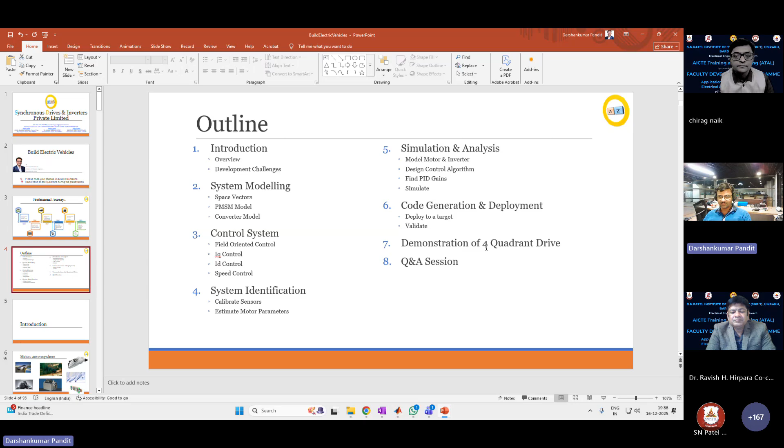One guy is asking to join, so I'll just share the link. From there we will go towards mathematical modeling, control system design, system identification, simulation and analysis, and code generation and deployment. I also have a demonstration at my desk here, but it might take us longer to go through that because I am still preparing that.

And I have to just forward this invite to the meeting. Sorry about that. Okay, yeah, so that's an overview, and then we can take questions and answers. Or maybe you can take questions and answers first and then go for the demonstration since it is going to take time.

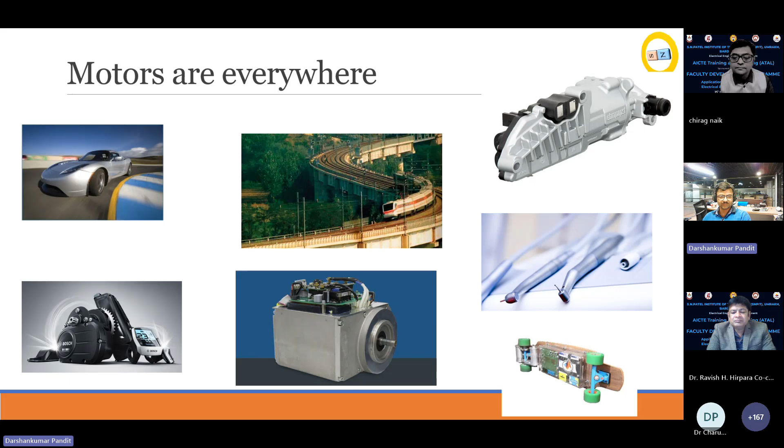As an introduction, motors are everywhere. We all know that electric vehicles have it. Apart from that, there is a lot of traction motors in railways as well as the suburb metro rail. There are electric compressors, air conditioners, power tools, and many medical devices that use these motors. What's different about them when it comes to automotive is that we can operate the motors in four quadrant operation, as against the IC engine which can only be operated in two quadrants of operation. These quadrants are mechanical or electrical quadrants.

If you designate one direction of rotation of a wheel as positive, let's say clockwise rotation is positive, then any torque that forces the wheel to move in that direction is also positive torque by convention. When both go together, the vehicle moves forward - this is called forward motoring, where speed is positive and torque is also positive. Power is the product of torque and speed, so power is positive.

In electric vehicles, power is stored inside battery systems. When power is positive as per this convention, electricity is converted from electrical energy into mechanical energy output at the wheels.

There is also reverse motoring, where the wheel moves in the counterclockwise direction, and the torque applied is also counterclockwise. Again, power is the product of torque and speed. So the vehicle moves in reverse, but the energy is still positive, meaning energy is still converted from electricity into mechanical energy.

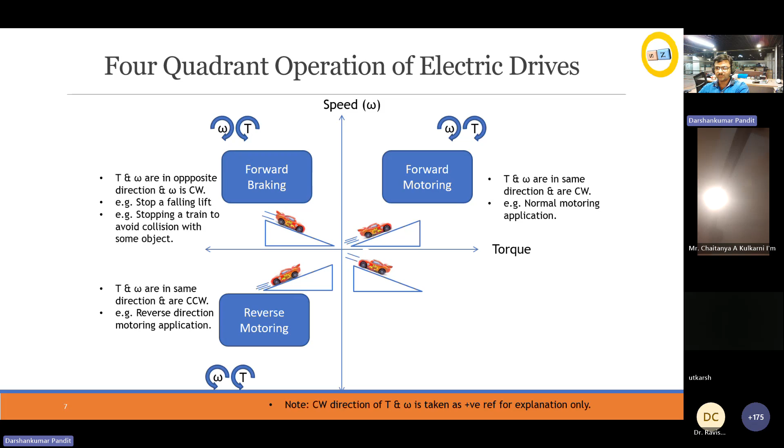Then we have forward braking, where the wheel moves clockwise but torque is applied counterclockwise. In simple words, you're going downhill and want to apply torque against the direction of rotation of the motor to stop the vehicle from going downhill - that's applying brakes, or reverse direction of rotation from the electrical motor. This requires a torque-speed product that is negative.

Whenever the torque and speed product is negative, it's possible to convert the machine from motoring into generation, or apply this energy into mechanical braking systems. This region is known as forward braking, forward regeneration, or regenerative braking. Here we're converting energy from mechanical input into electrical output, which we can save into batteries.

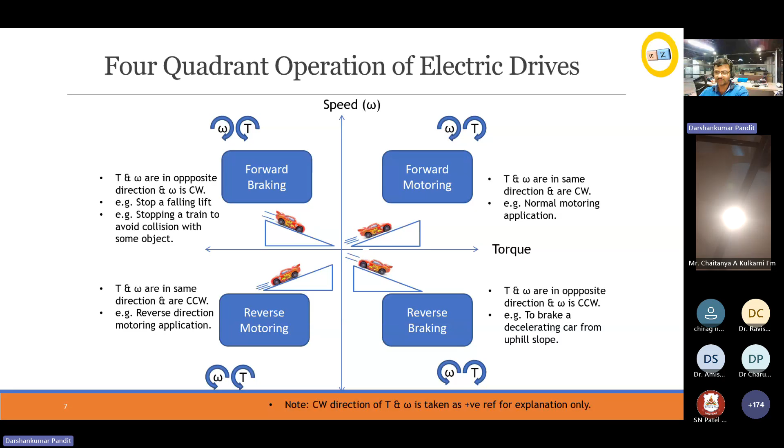We also have reverse braking or reverse regeneration, where the vehicle is going downhill but in reverse, and you want to propel it forward. So torque is applied positive while wheels are going in negative direction - again the product is negative. The energy is converted back from mechanical to electrical in case of reverse regeneration.

Electrical motors allow us to switch from motoring to generation based on their inherent characteristics of energy conversion from electrical to mechanical and vice versa. This is why we call them machines in general, not motors or generators.

There are different types of machines operating on different principles, which are fundamentally the same, but based on operational principle we call them DC machine, AC machine, and various other types for the electric vehicle industry. They're classified based on two basic factors: volume and weight. The lighter the weight and volume, the more suitable it is for electric vehicle applications. If too bulky, it might require a bigger vehicle like a railway engine, which used to use DC machines and are now migrating to induction machines.

But for small cars and vehicles, we cannot use big motors. So what's getting popular for these kinds of vehicles is the permanent magnet synchronous machine, and there's also another category called BLDC machines. Nowadays there's increasing popularity of switched reluctance machines and synchronous reluctance machines. Each type has its own complexity in operation, advantages and disadvantages, and primarily weight, volume, and efficiency are making them popular for different applications.

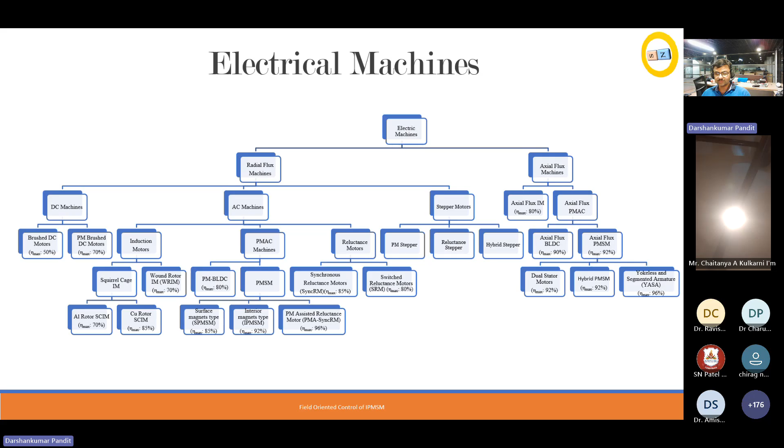Today we are going to talk about permanent magnet synchronous electric machines, where we use permanent magnets to energize the field of the machine. This can be DC as well as AC. Within AC, we get more efficiency, and the back EMF can be trapezoidal as well as sinusoidal. Whenever it's sinusoidal, the windings are distributed sinusoidally, allowing us to produce torque uniformly. For BLDC, we have glitches in torque generation.

Within sinusoidal type machines, there are two types of rotor arrangement: surface mount magnets and interior mount magnets. These are classified further as surface mount and interior mount magnet based machines. The left one is the surface mount PMSM and the right ones are the interior mount PMSM.

The interior PMSM has an added advantage that it also allows some reluctance torque, meaning that if the magnet gets demagnetized, the machine is still capable of producing torque based on the reluctance machine's principle. However, reluctance torque in case of IPMSM is less compared to the electromagnetic torque, which is generated because of interaction of the magnetic field with the stator's rotating field.

I'll explain what that is shortly. But there are some advantages and challenges of each type of machine.

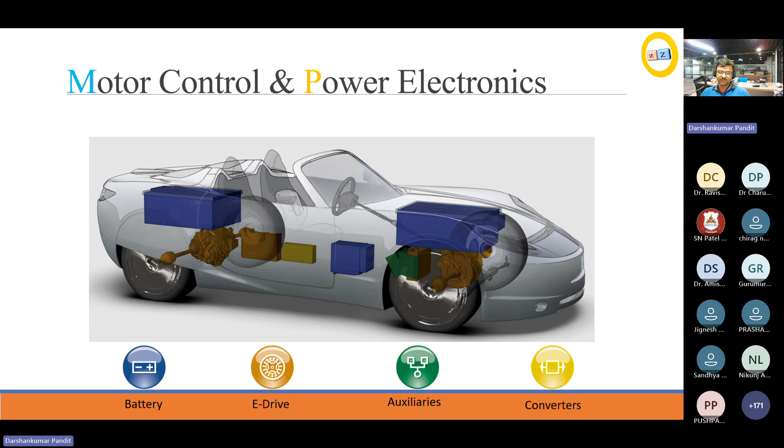As far as a vehicle is concerned, power electronics is used everywhere: inside the battery in the battery management system, in the e-drive system also known as motor controller, and in auxiliaries such as DC to DC power conversion. We need to reduce battery voltages, such as the 350 volts used in Tesla Model S and Model 3, into 12 volts required by auxiliaries like headlights, side lights, indicators, wiper motor, and window shield. That's where DC-DC converters are employed, and there are different types of converters.

The control system processes this and generates gate pulses. These gate pulses are fed to either a MOSFET or IGBT based inverter, and the inverter converts the DC electricity into controlled variable voltage, variable frequency currents required by the motor. That leads to the exact required torque, which is then given to the transmission, usually a single speed gearbox, and that moves the wheels.

When we want to do generation, we apply torque in opposition to the direction of motion of the wheels, and that generates electricity. We use that to store charge inside the battery, if the battery is capable of storing it.

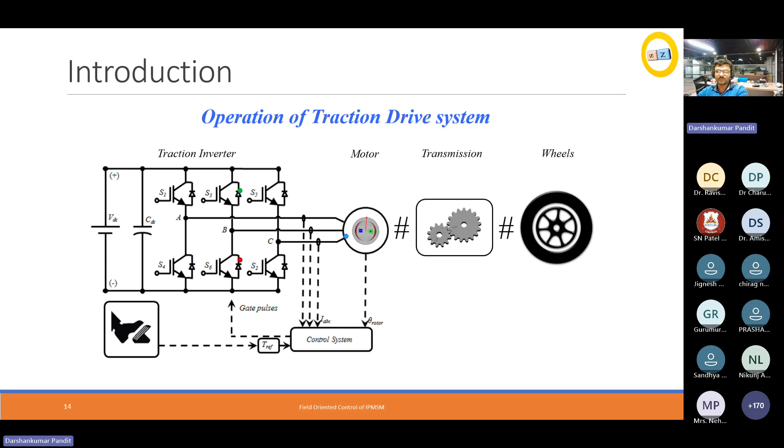We can also do independent generator control. This is a concept which is getting picked up. By doing so, we can operate the IC engine at its maximum potential efficiency, and we can improve the efficiency of the IC engine. There is also a concept of range extended electric vehicle, where you can power an electric vehicle from battery as well as an IC engine.

This is also similar to the series hybrid electric vehicle concept, where the same machine works as a generator and motor. Of course, there are two different machines, one for generator and one for motor, for mechanical coupling with the IC engine and wheels respectively. If the battery is discharged, the IC engine can power up the whole system and vice versa. In some cases, the IC engine is replaced by a fuel cell, so we call that fuel cell hybrid electric vehicles, such as fuel cell buses in India. In some cases, there can be a CNG machine.

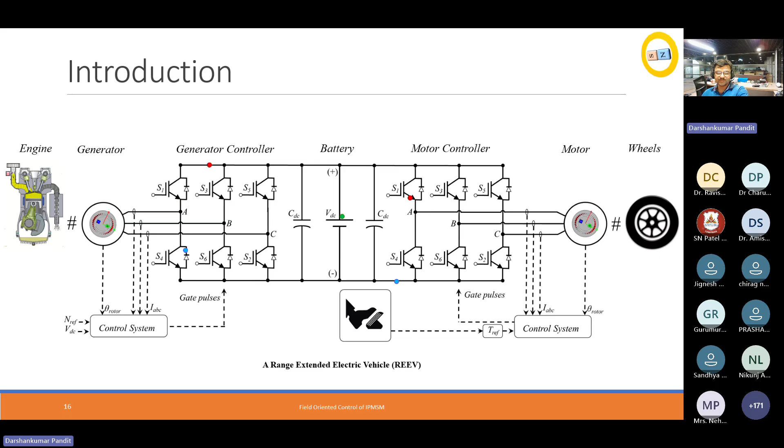So that is briefly the concept of the inverter. Now, in simple words, how do we convert this energy flow? If we take a simple concept of a DC machine or a BLDC machine, here is how the current will flow to produce a positive torque.

Two switches out of the entire six bridge will work at a time. Whenever we want to generate positive torque, we want to make the current flow from winding A into winding B, and that is how these switches will conduct in this schematic, so these gate pulses will be fired.

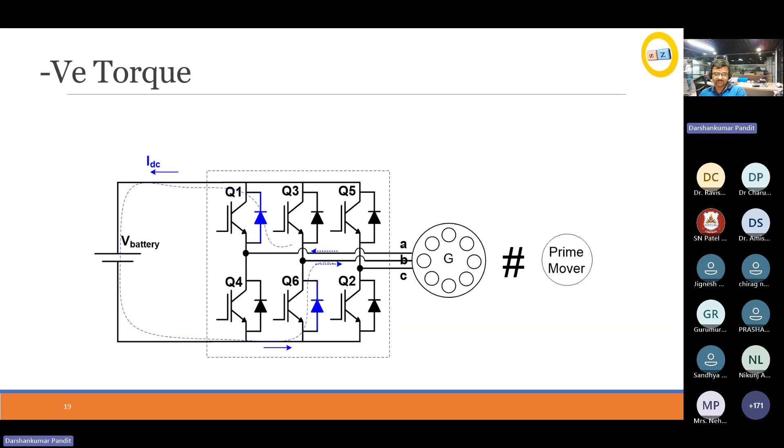But when the current flow through winding A and B reverses, the same machine acts as a generator. Instead of those switches, the anti-parallel diodes will conduct, and the current flow at the DC link also will reverse. For the DC link, the power is represented by the product of VDC into IDC, so in this case that power is negative.

That means it is working as a generator, at positive speed. Again, we go back to the theory where current is flowing into the motor A phase winding. But if we want to change the direction of rotation of the wheel, provided we have the position information, this can simply be achieved by changing the active phase from A to B phase. This way we successfully manage to reverse the direction of current from the motor winding. However, the current coming from the battery is still in the same direction.

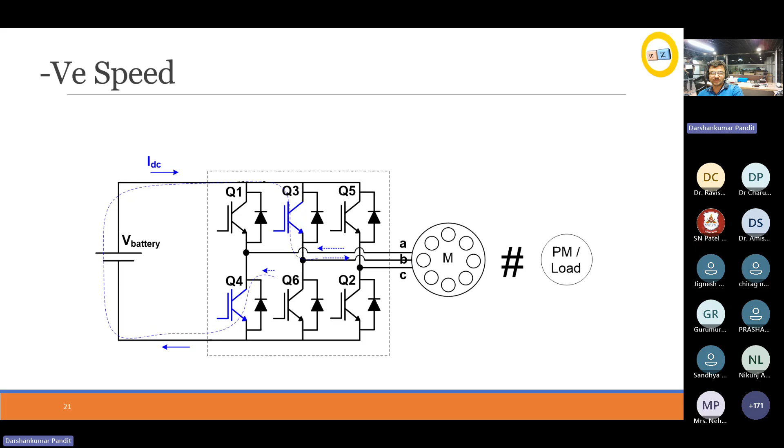So the power flowing from the battery is still positive, and electricity is still converted to mechanical energy while reversing the direction of rotation of the machine. Then there is a fourth case, reverse regeneration, where we reverse the direction of rotation, and the antiparallel diodes of Q3 and Q4 switches will conduct. That is not shown here.

When we want to implement this motor control algorithm for electric vehicles, we also see a lot of developmental challenges. These are majorly categorized between modeling and simulation at the system level, then control system design, then embedded system programming. A lot of embedded systems are there, and then implementation on real world hardware. Some of these challenges are explained here.

First, we require the accurate rotor position of the permanent magnet motor, and this is achieved via some sensors, which are Hall sensors or quadrature encoder sensors, as illustrated here.

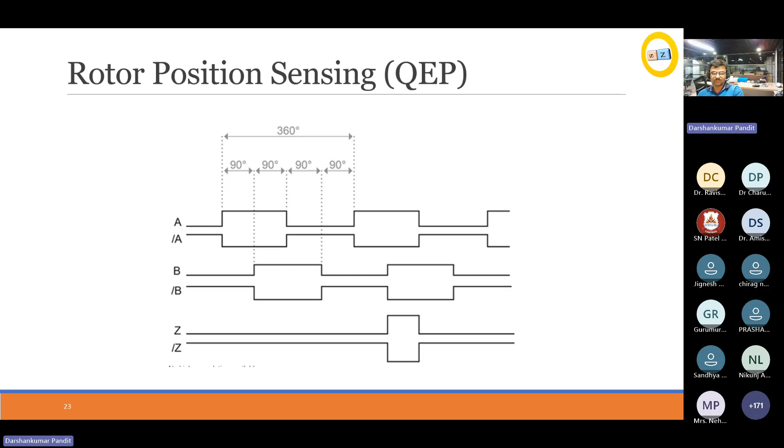Then there are some machine characteristics we have to adapt to. They are not exactly as per theory, so we have to identify these machine characteristics and then operate the machine at that operating point.

The traditional control theories such as field-oriented control or direct torque control also have limitations which require modification by additional control theories, such as maximum torque per ampere, or unity power factor, or constant torque angle control, constant stator flux angle control, depending on the type of motor, which is IPMSM in this case.

So we have modified field-oriented control, and then there is something called field weakening. There are four types of field weakening which we need to implement.

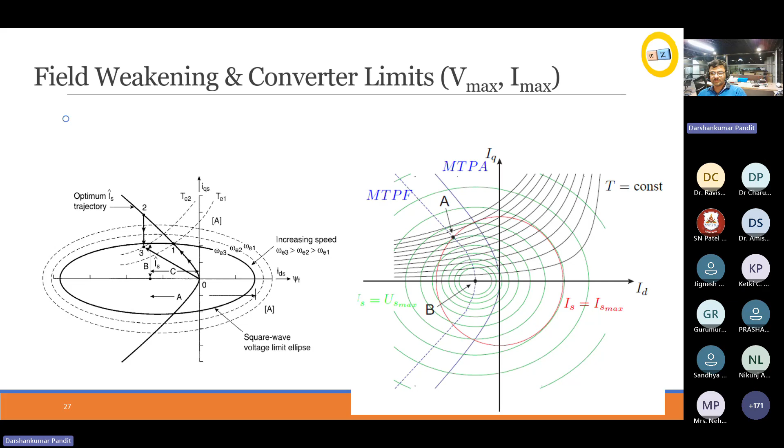By implementing these different algorithms, we are ensuring that the machine always operates at its maximum efficiency point. The copper losses are same as core losses, and the machine also operates at a speed higher than the rated speed while trying to maintain this energy balance. That is just discussing some of the challenges.

Now, when we want to start development, how do we start? The first is systems engineering. We need to understand the system, and in order to do that, we have to convert the entire real system into a computer model. So that is what we are going to do.

But in order to understand that, we will have to understand some concepts from signals and systems. So that is what I'd like to cover here, in case the students are not from an electrical engineering background.

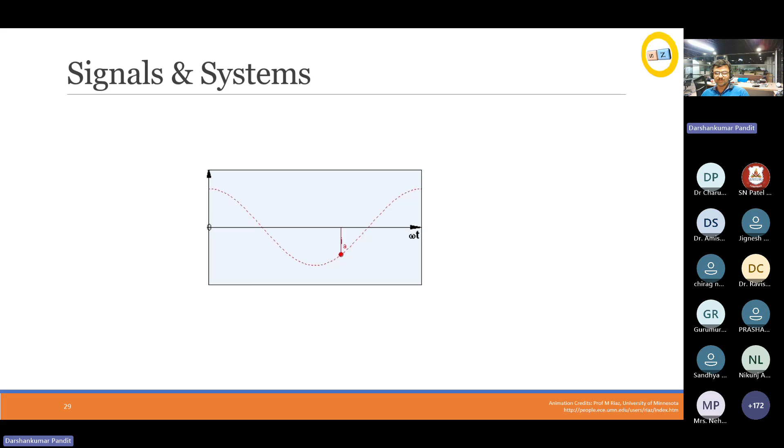In electrical engineering, voltages, currents, flux—there are many quantities which are sinusoidal and time varying. It's not possible to plot them easily because at every moment of time this red point changes its amplitude, so it's difficult to process this information as long as it is time varying.

What we do in electrical engineering is change this complex sinusoidal waveform from the real world into something known as mathematical space. Within that, there is a vector denoted by this light blue arrow. That vector, when considered rotating in a counterclockwise direction at a frequency, is known as the electrical frequency of the vector.

This mathematical space can represent the real world physical quantity such as voltage, current, or flux. So one light blue vector rotating in a counterclockwise direction, which is conventionally positive for electrical engineering, can be decomposed into one phase, two phase, three phase, or n number of phase components. And we managed to convert the sinusoidally time-changing quantity into a mathematically rotating vector in mathematical space.

Now, what we are going to apply is this theory by Albert Einstein of general relativity for electrical engineering in order to control our motor. What is the theory of relativity? I think everybody is familiar with that.

If you are at a station and you see a railway moving, the train is moving, then you will see that moving. If you are inside the train, you will see the station moving. If you are inside another train that is at the same speed as the first train, then you will see the first train as stationary. Now, all of these concepts that we learned at school—they are applied in linear motion. The train always moves in one line.

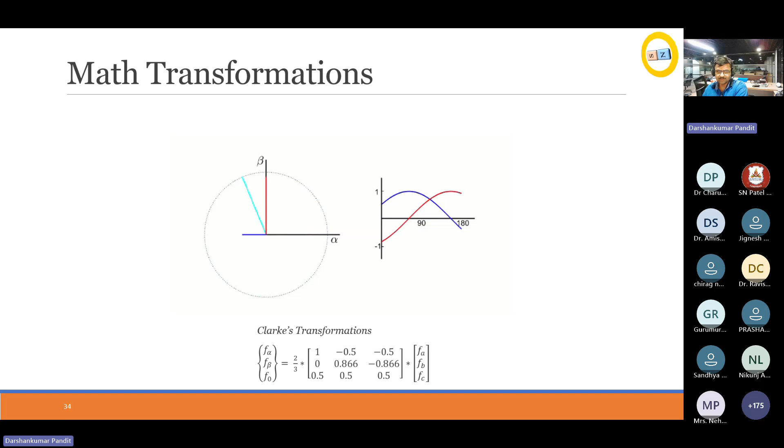Mathematically, we apply the same concept, known as Park's transformation, where the axes which were stationary earlier are now rotating. So the vector which appeared rotating to you in the stationary reference frame now becomes a rotating reference frame, and in this case it is rotating exactly at the same speed as the fan, known as synchronous speed.

When this happens, the projection of this vector on these two axes, which were sinusoidally time-changing before, becomes a constant DC quantity. By doing this, we have also removed one quantity which Albert Einstein was successfully able to remove in physics, known as time. So now we got rid of time, and it's just a DC voltage, DC current, or DC flux, and it's much easier to control DC systems.

How do we implement that? I have made all of these blocks. If you use MATLAB, you can find them inside the motor control block set. All this math which I was talking about is already done, and you can use these blocks, or you can create your own.

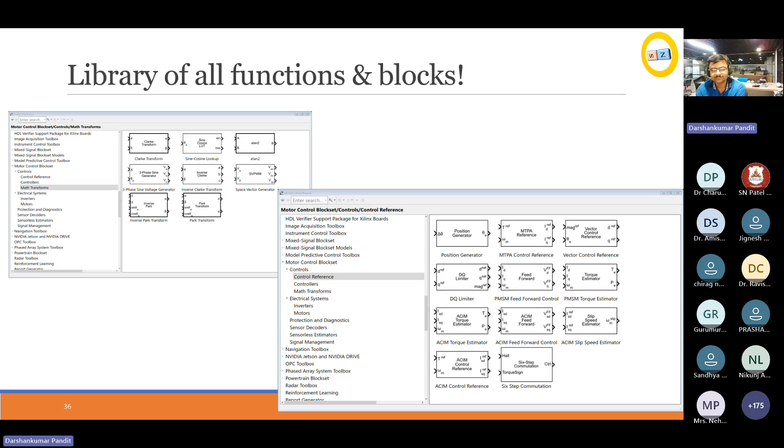If you're good at math, you can create your own blocks and measure the voltages or currents, feed them into Clarke and Park transformation blocks, and read the position information either from a sensor or various sensorless techniques, and then try to implement a control theory.

In this case, the control theory is field oriented control, where we are trying to control the D and Q axis currents, which is what is in these middle blocks. There are two PI controllers, and then they will generate some voltage references.

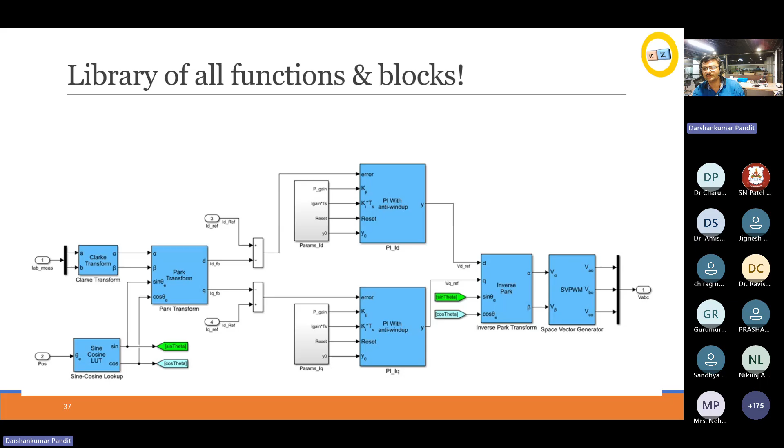When we do the inverse of what we did in terms of Park and Clarke transform, that is called inverse Park and inverse Clarke transform, and then we get AC quantities back. In doing this, we can also apply a different modulation technique that allows some more advantage in terms of utilizing DC link voltage. That modulation technique is mentioned here, also known as space vector modulation.

Now I hope there is no doubt until now. We were able to reduce the complexity of a time-changing quantity successfully, and mathematically we are able to do something that is controllable. But how do we control a physical machine? Because it's a big machine that is going to move our vehicle.

But if we manage to solve them, we can also predict the behavior of the machine in time. We can know what will happen to the currents of the machine after, let's say, 1 hour or 1 minute, and we can control the machine accordingly by applying a different voltage than what was expected. So we not only got rid of time, we can predict the future by means of this mathematics, and that can be done by implementing all of this correctly.

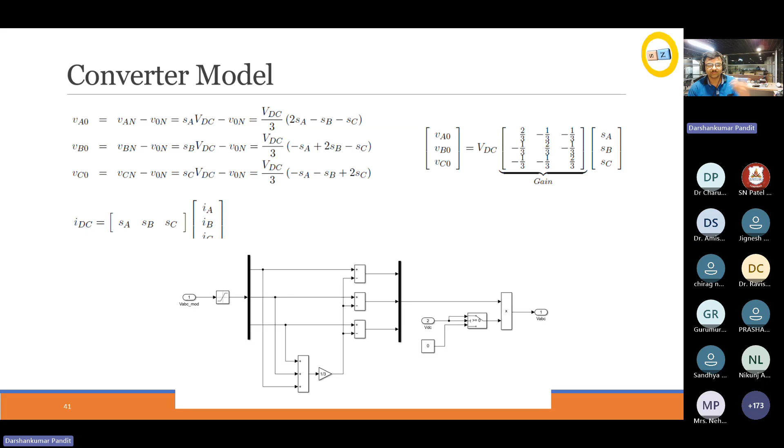The last part which we need for simulation is the converter. The converter is nothing but 6 switches, which can be reduced down to 3 switches mathematically, and we can create a model for the converter as well. So all these mathematical models are there, and we can go to the next step.

So we understand the system, we have a physical representation of the system in differential equations, and we can reduce the complexity of the system from an AC time varying quantity into a DC machine. Now DC machines are easier to control and we can apply different control systems.

The popular one is field oriented control. There is also BLDC 6-step control. There is also direct torque control, and all these techniques get modified by different maximum torque per ampere techniques and field weakening techniques. So the exact implementation will carry a lot more complexity.

But here is a simplified implementation of a field oriented control for a speed control system, where there is a reference speed that is compared with a feedback speed obtained from a sensor. This goes directly into reference torque generation.

If you are using a complex machine like IPMSM in this case, it will have an MTPA control reference block which will compare the speed and torque feedback, and it will try to find the optimized set of D and Q axis reference currents. These are fed further to more controllers for D and Q axis currents.

D axis represents the direct field axis where the permanent magnet flux of the machine lies. So what we are looking at is the north pole of the rotor axis when we talk about direct axis. And if you increase the D axis current, that means you are increasing the flux of the machine from the stator, and you can increase the magnetization of the magnet.

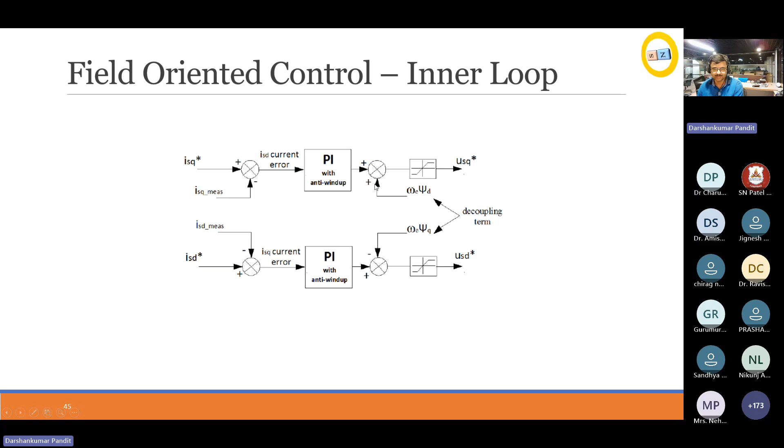In order to linearize the system, there would be cross-coupling terms, omega e psi q and omega e psi d, which we can mathematically add inside our controller beforehand, so that this effect of system voltages gets negated. That is why you see this addition or subtraction of omega e psi d and omega e psi q decoupling terms. This allows us to get rid of the extra terms from equations 1 and 2, giving us equations 7 and 8 when we go for Laplace transform.

Once we are in S domain, it's all frequency domain, and it allows us to generate transfer functions of the new duty cycle into currents, and new torque into speed. So over here we have our transfer function of ID to VD and IQ to VQ, and that is simplified here.

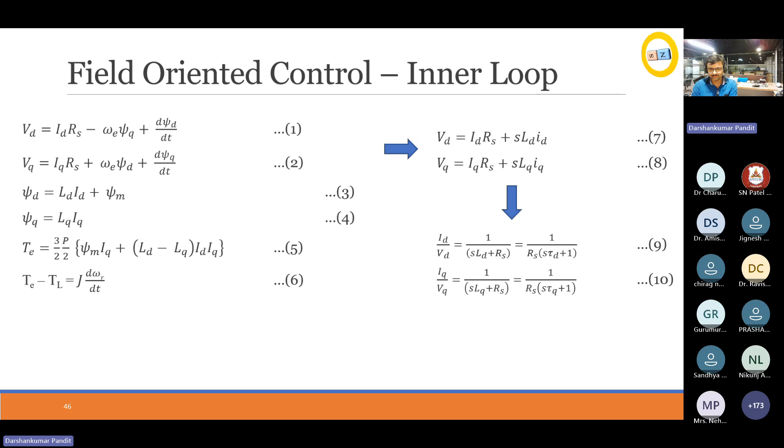Also, this tau d quantity is the stator time constant for the d and q axis respectively. Mathematically, it is just L by R of the machine. Having said that, now we have the transfer functions, equations 9 and 10. For the Q loop, it is equation 10, which represents the plant model for the motor, at least the electrical dynamics are covered.

There are also more dynamics of the system. We are sampling the current, so there is a sampling delay. We are holding some PWM duty cycle for at least half of the sample time, so there is a holding delay. The inverter itself takes some time, let us say half of sample time, to generate the new pulse width modulation from duty cycles into actual switching, so there is this delay.

All of these delays are represented by some transfer function, which is a single order delay, and then the control algorithm will also take at least one sample time to execute all the inputs, feedbacks from inputs into the generated PWM duty cycle outputs. And all of this has to be controlled by our PI controller.

So to do that, our PI controller also needs a transfer function. We can create a transfer function Kp plus Ki by S, and we can also simplify that into this pole-zero form of a PI controller. The PI controller has a quantity called the time constant of the PI controller, which is nothing but a ratio of Kp to Ki. But now we have almost all transfer functions of the entire system.

So the real world system can be represented this way, and I guess everybody is familiar with control system simplification. All we need to do is block diagram reduction, or maybe apply some different complex advanced control techniques. Over here, an example is shown where all of these block time constants are very fast compared to the time constant of the machine, which is the L by R time constant, in milliseconds.

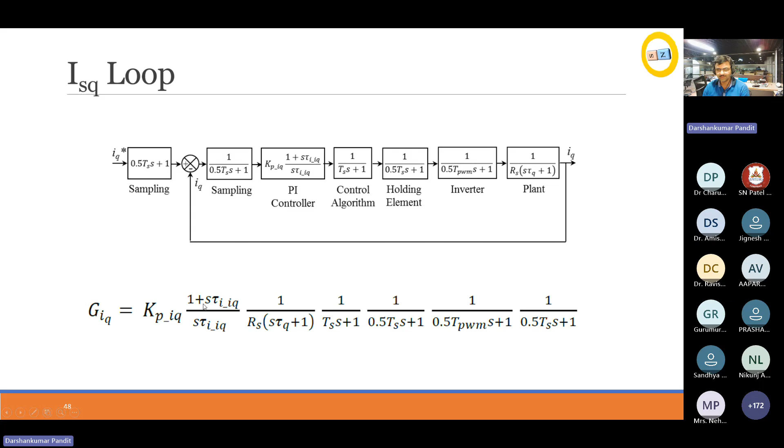The system's PI controller is sensitive, so it can be faster or slower based on whatever time constant it can cancel. And the slowest pole, if we cancel it, the response is faster. The slowest pole in this case is the motor's L by R time constant. So if we set the time constant of the PI controller's zero to match the machine's L by R time constant, it will cancel this pole. If that happens, we can have at least an initial design of the PI gain, at least the time constant value.

Remaining time constants can be created as lump sum, representing the standard second order system, which is well analyzed in a textbook by Ogata. Please refer to it. A nice analysis is there, and based on different values of zeta, underdamped, critically damped, and overdamped, you can find the response of the system.

I have taken critically damped here, and based on that, it allows us to find the value of the proportional gain. This one gives us the integral gain because it's just a ratio of Kp over Ki. We find this PID gain, and all of this is also there. If you have MATLAB, you can run this script and find the analysis.

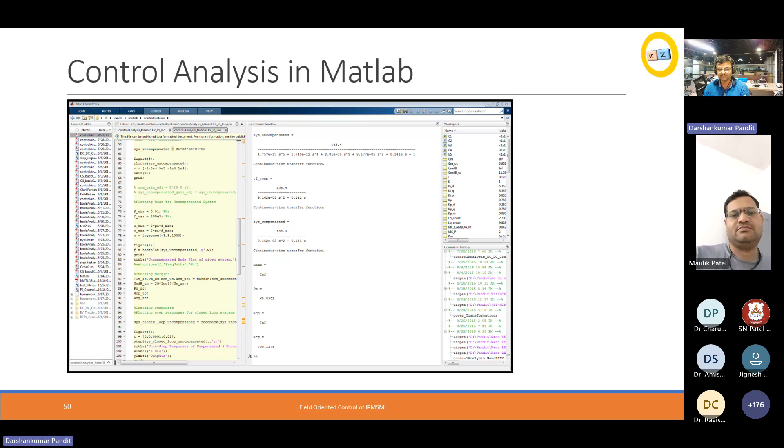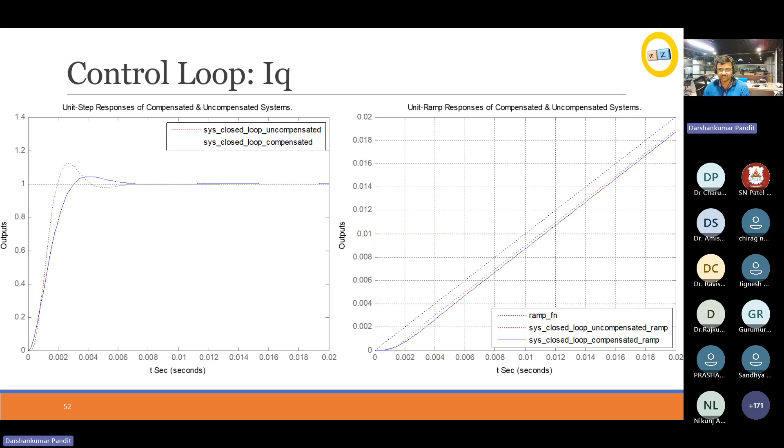You can find the transfer function of your motor, and the Bode plot of both uncompensated and compensated system, pole zero maps, stability analysis, and the predicted behavior of the system when you go for closed loop. Once this is satisfactory, you can fix your PID gain or improve on it and go for the next part in the control system design, which is design of the speed controller.

Speed controller is used by something known as cruise control and hill holding. Hill holding takes position control, but basically this is essential in implementing those features inside electric vehicle. To do this speed control, we have to at least assume that the current loop has settled down.

The reference current has been reached by the PI controller. It is in steady state, which means you have to allow at least four times the steady state delta time constant of the control loop. We usually, as a rule of thumb, take 10 times of the current loop's time so that reference current is reached by the current controllers and the remaining system components are placed here.

The mechanical equation is converted into S domain, and that is also represented. Then we again do our block diagram reduction and try to design the speed controller. Now, if you look at the transfer function, you'll see that there are two poles at origin for the speed controller, this middle one. That means the system inherently starts at about 180-degree phase.

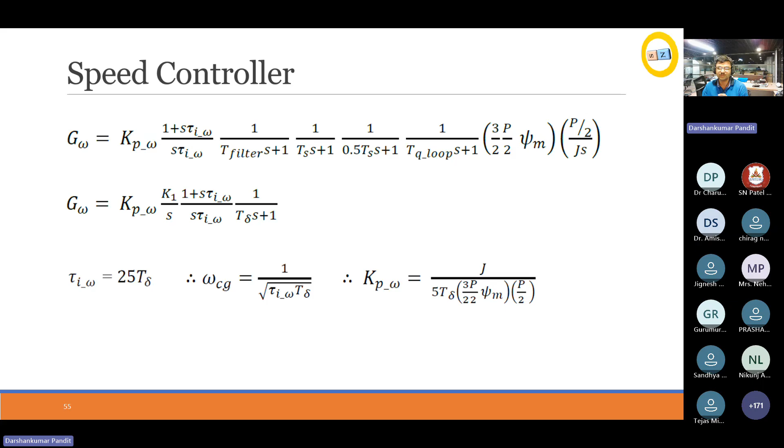Which also means that any random value, usually trial and error, will push the system off the limits and make it unstable because there is zero phase margin available inherently in the system. So we have to do some complex math here also and try to find out the zero of the PI controller, which is before the pole of the next speed controller system, and that is done here.

Now all this is theory and it's fine, like everybody knows theory, but how do we actually go ahead and implement that in electric vehicle? That is where engineering starts, and that is complex, but most of us succeed at doing that. So let's get to it.

So we take a real system. In our case, we are building a system for electric two-wheelers. We have a BLDC two-wheeler motor, and there are plenty available in the market. We have to find the parameters. System identification is extremely important here. If we get the wrong parameters, it's never going to work.

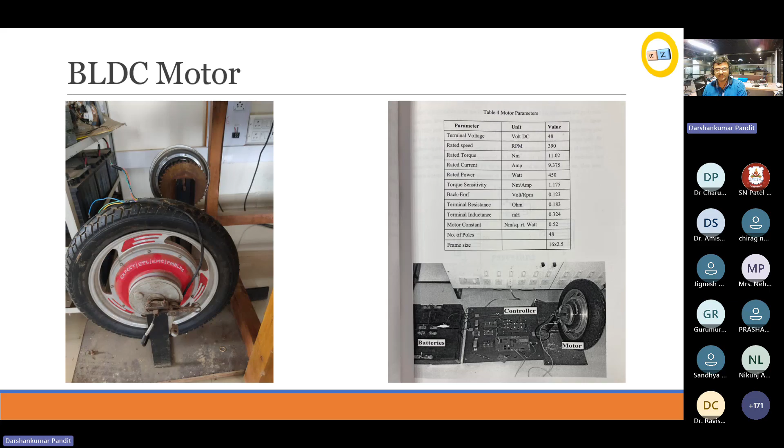The essential parameters are number of poles of rotor of the motor, back EMF value, the number of phases, and inertia, and all other parameters. Sometimes we have to conduct this thing.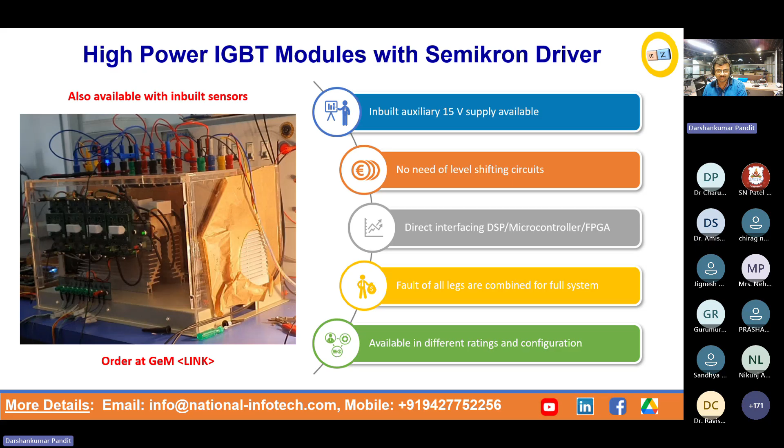Then we require some inverter. This one is laboratory inverter, and then you can get something made by your own. So we also are trying to build our own inverters. You require a microcontroller to implement the control theory correctly.

In this case, we are going to use Texas Instruments F28379D microcontroller, and then we require some software tools. So you can do either C programming or you can use high level programming languages such as MATLAB and Simulink, which is what I'm going to talk about.

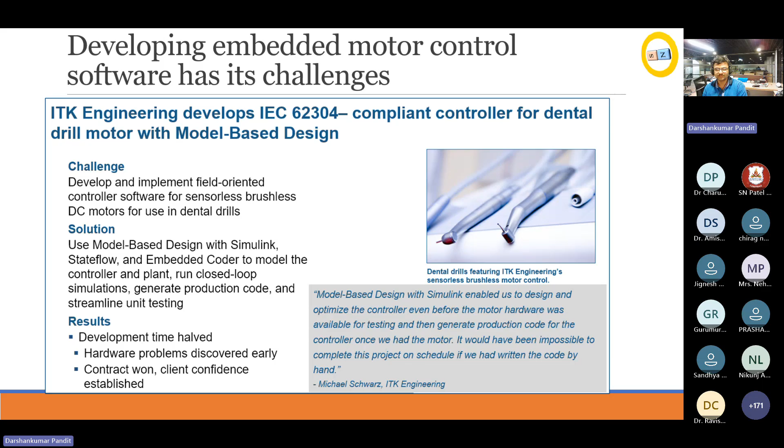Part of it is the motor control block set. I have been leading the design, and using this, customers are trying to achieve the targeted design much faster than what they thought of initially.

Some examples are given, but we don't need to go there. What we are doing is we're going to take an example and run that motor which was there in the video. So how it works is simply you take a model inside Simulink, and you simulate that. If the results are perfect, the same model can generate a C program that can be downloaded into this application board of TI, and it can be used to run the motor at different speeds.

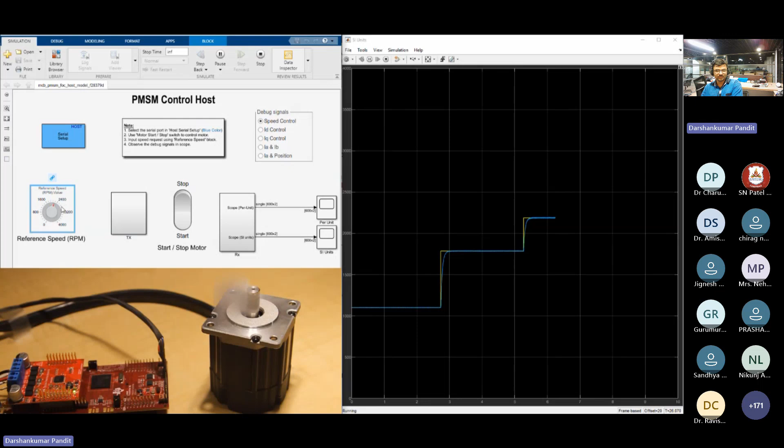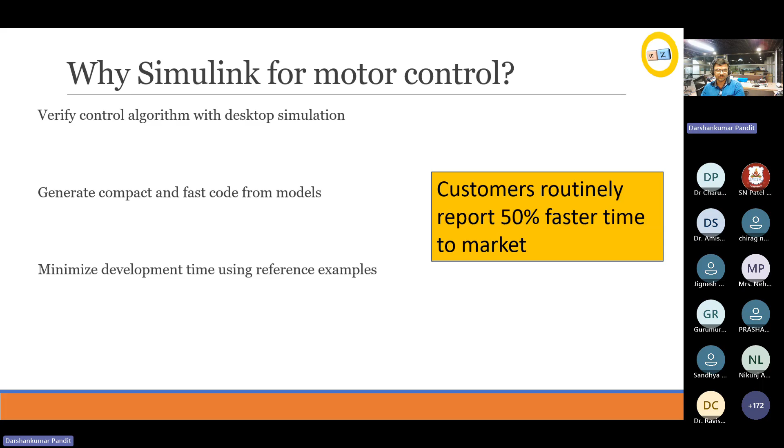So this one is a low voltage laboratory motor. Why do you require Simulink to design is because it helps you with simulation as a first step, and then there is a lot of model-based design that allows flexibility and faster implementation.

There are plenty of features, not just what I explained. So more features are also there, you can explore them in your free time. But we will talk about implementing this field-oriented control for now. We will be implementing that using Texas Instruments boards, and all semiconductor companies have their development boards. You can take any popular semiconductor, it doesn't need to be TI, but here the discussion is limited to TI. They have multiple kits, kit 1, kit 2, kit 3, and depending upon whatever is available at your engineering college laboratory, you can take one of the kits and implement this.

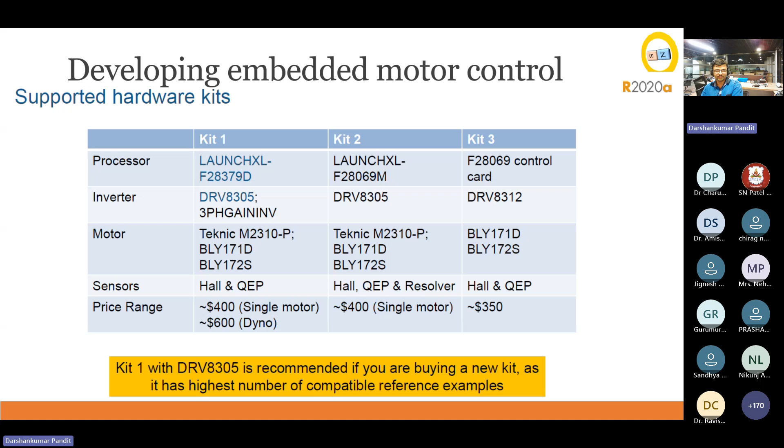And here is a workflow. So what we do in practically implementing FOC is we have to first make sure that we can see the system properly. And how do we see the system? Through our eyes and ears. In terms of embedded systems, they are called sensors.

So position sensor, current sensor, ADCs - whether they are working correctly or not, we will determine, and we will calibrate them to make sure we are actually measuring 1 ampere current in the real world when we see that through the microcontroller. That is called calibration.

Second, we estimate the motor parameters. These motor parameters which are obtained from the manufacturer may be correct or may be incorrect - they can have 10% variation even from the same system motor model. So it's always better to conduct some experiments and measure the right parameters, because our control system design and stability depends entirely on getting these motor parameters right. That is how we calculate the gains of the controllers.

Once we have that, we have to mathematically generate the model of both the motor and inverter, then design the control algorithm. You can simulate and deploy on the hardware, and once it is fine, that's okay. Otherwise, you can iterate over the design until the right performance is achieved.

So as I said, we'll be using this TI kit. It's very popular - you can Google it, or I can share the link with Professor Chirag after the session. This one is using a small BLDC motor, a small inverter, which is seen on top. This one is the DRV8305, one of the popular drivers by TI, and the bottom one is the microcontroller card.

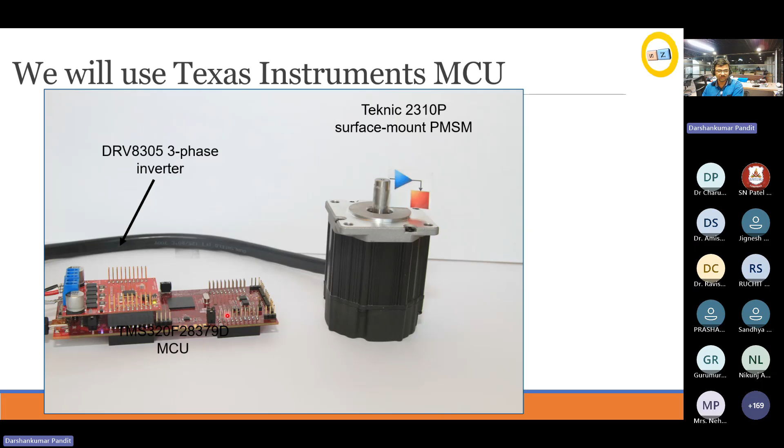So what we do by calibration of sensor is we connect the system, but we don't connect the motor, which means whatever you try to measure via the current sensors of the motor, it will always be zero since the motor is physically not connected. So when the motor is not connected, it will draw zero current, and that is what will be seen by the current sensor via analog to digital converters.

We measure this - at room temperature, this count is different than at the environmental temperature outside the lab. We have to measure this every day, or at least once a week, and based on the electronics used, the sensitivity of the board, this will vary. But whatever is there is measured in terms of ADC output counts, and that is stored inside a variable. We can view that in an oscilloscope, and we can find out the mean value that will be used by our programs so that we know where the 0 ampere comes.

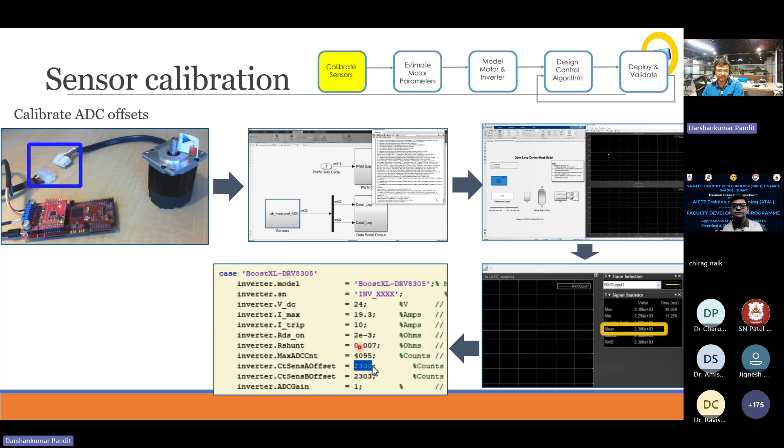Next, we also need to scale the currents correctly. For that, we have to go through the circuitry for current sensors correctly, and we have to map the currents with real world amperes. But that's all about the calibration of sensor.

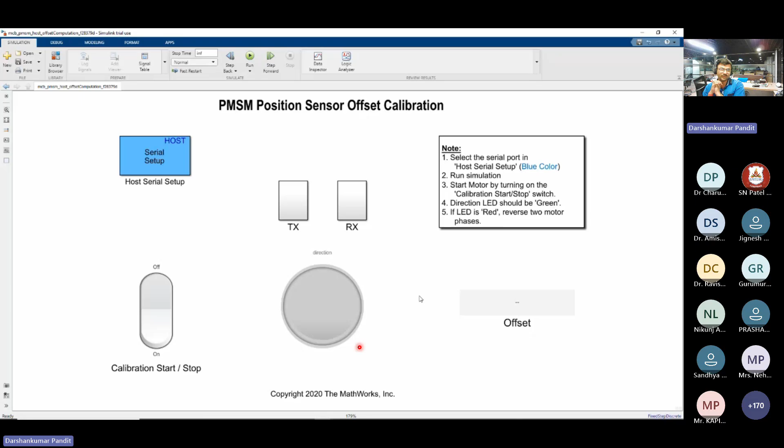One of the algorithms here rotates the machine at 10% of its rated speed, at a very low speed, and 10% of voltage is applied using V by F control, voltage by frequency control. The machine will spin, and at this time the rotor north pole will come in alignment with the stator's rotating magnetic field, and we measure the position feedback. In this case, it's the Hall sensor.

We can do the comparison by the algorithm. Once the comparison is done, you know the position is offset by some value, and that is going to be fixed mechanically because the motor has been fixed and the position sensor is fixed on the motor. So every time it would be, in this case, zero point 0.2.

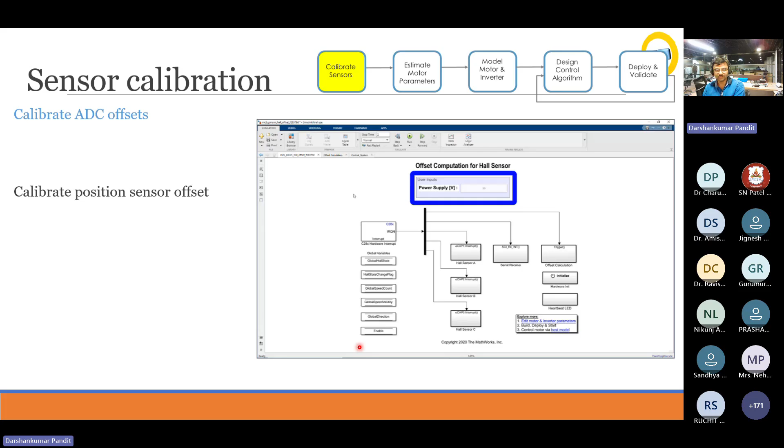All the quantities in this discussion are converted into something known as the per unit system for motors, a concept we have introduced. It's very popular for power system engineers to represent voltage, currents, and power levels. We are applying that for motors and embedded systems, where the quantities represent the motor parameters, such as position in this case. Instead of representing that in radians or degrees, we represent it in per unit. Likewise, for currents, the full scale current of the motor is converted into per unit. Rated speed of the motor is converted into base speed, which is 1 per unit, and that's how the program is implemented. That is also what makes it scalable, so once the algorithm is decided, you can use it for different power ratings of motors.

Next is parameter estimation. You can perform different tests in the laboratory manually on the machine to identify its parameters. In parallel, you can use the algorithms we have developed, which require some minimum inputs, some minimum information of parameters, for the machine to run.

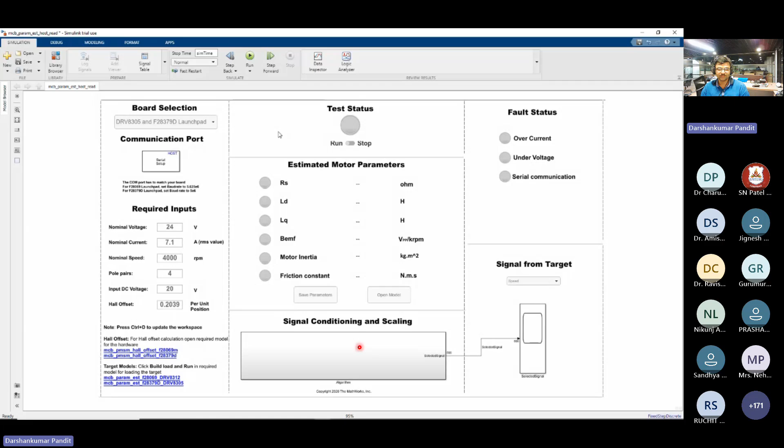You input these parameters into the machine, then configure the corresponding algorithm to work with your system. Once that is done, it will generate some programs and run them in real time inside your microcontroller, and force execute hardware tests that measure the motor parameters, such as measurement of motor resistance, stator resistance, which is as simple as Ohm's law. We implement Ohm's law, measure the motor current, and know the voltages, which we can measure via this potential divider, allowing us to measure the stator resistance.

Then there is LD measurement, LQ measurement, back EMF test, and retardation test. So all of these tests are done, and this will be executed on the target motor.

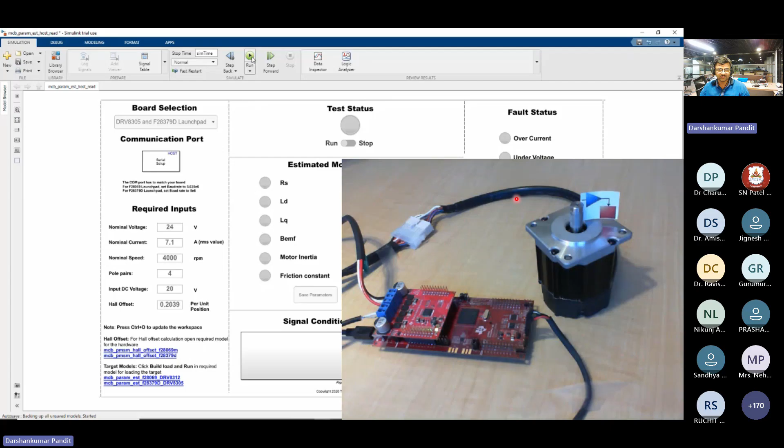There is a host model, a companion model connected with the microcontroller that talks with the controller via serial communication in real time. It collects this feedback information and displays the measured parameters. So the motor will undergo a couple of tests by these algorithms, which are specifically designed to implement these parameter estimation techniques. Once we have, for example, back EMF and inertia, we have identified the system correctly.

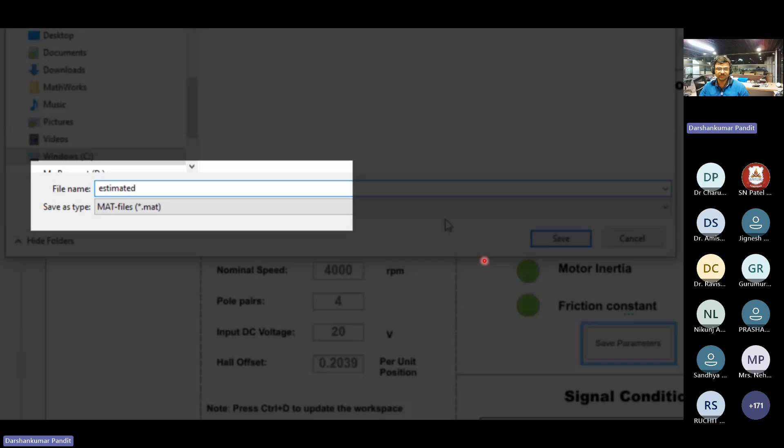The whole process is known as system identification. So we have identified the system correctly and we have all the parameters. You can save them and then start working with them with the systems engineering team. All of this can be saved, and once it is saved, you can import that into your simulation models as step one, and try to simulate your real world motor into computers.

You can just load them, and here you can view them. It would be a simple data structure, so anybody who's familiar with data structures, that is fine. Or you can also open it in Microsoft Excel and view them. So that's all about parameter estimation.

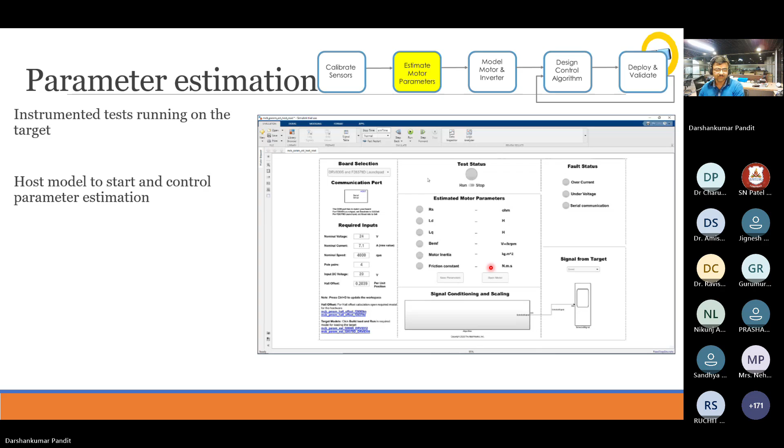The next step is this. You can also import parameters from your measured machine in the laboratory, as well as from motor design software such as ANSYS or Magnet. That is also possible.

Once you have the parameters, you have to model the motor and inverter, and there are different fidelity levels of this modeling. There can be an average value model, which is required to do control system design, or a switching model, required to do inverter design. You want switching dynamics for capacitor placement or snubber design and so on. There can also be different types of inverters, like modular multi-level inverter. So you can have different models, and each model will have its own complexity.

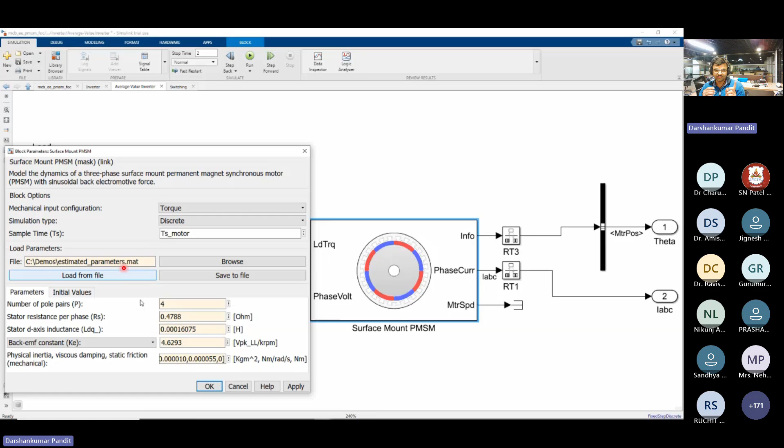Starting with the average value inverter and motor model, this will implement all the math that we discussed earlier. That math will use the measured parameters from the motor, so that the representation of the system is as accurate to the real world as possible, and we can find the real world representation.

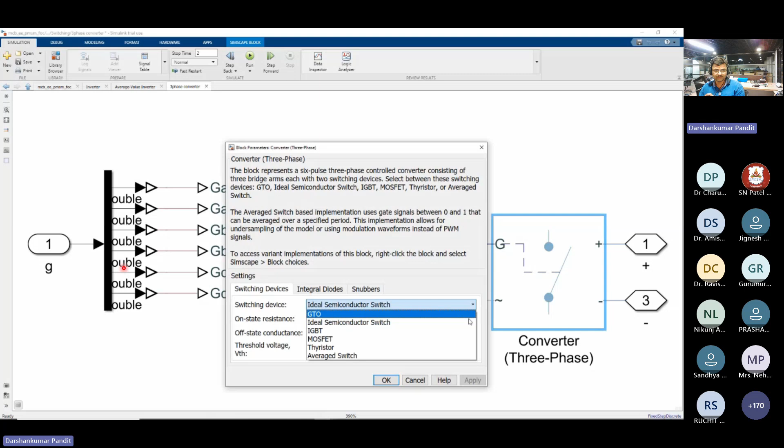The second part is the switching model, where we use a different simulation technique. Instead of Simulink, we go to SimScape, which is an acausal simulation model, and it can mimic the switching dynamics of the inverter, allowing users to design a better inverter. At some point you can configure your devices, such as MOSFETs or IGBTs, with various parameters such as RDS-on, state time, off-state time, and analyze the behavior accordingly.

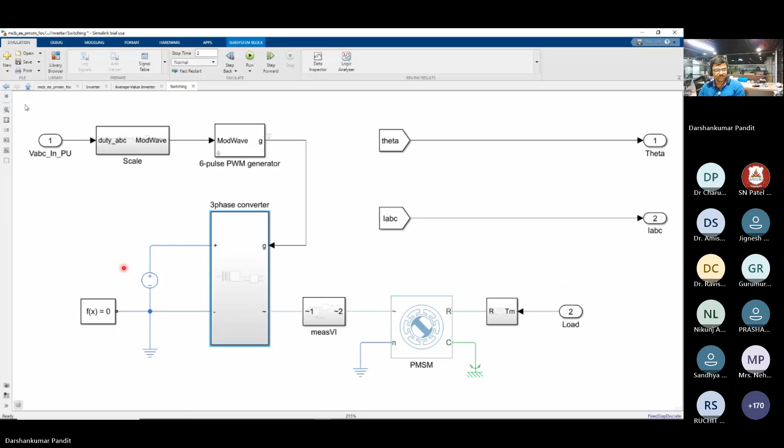Once you are good, we go to the next part where we design the control system and tune the loop gain and verify the whole thing in closed loop simulation. So how do we do that? We start with the speed controller from our concept of field-oriented control, where there is a speed PI controller, and then we go from there.

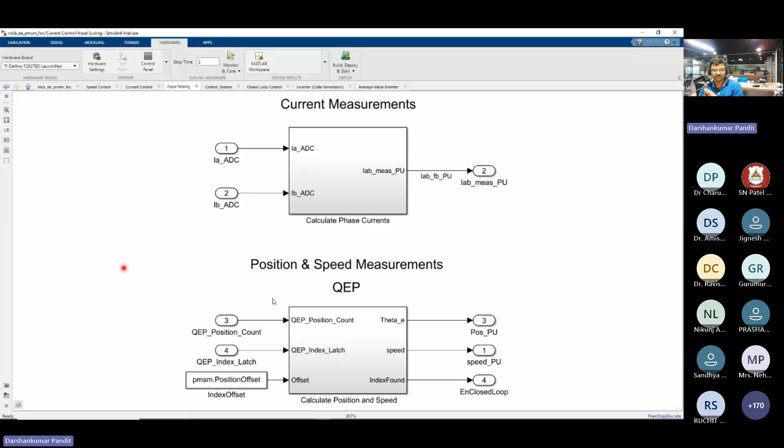The signals are taken to the current controller. The real position feedback and current feedbacks are supposed to come from the hardware blocks, so that is what is being done here. Texas Instruments also has a hardware accelerator for the quadrature encoder, so that needs to be post-processed, and those blocks are doing that.

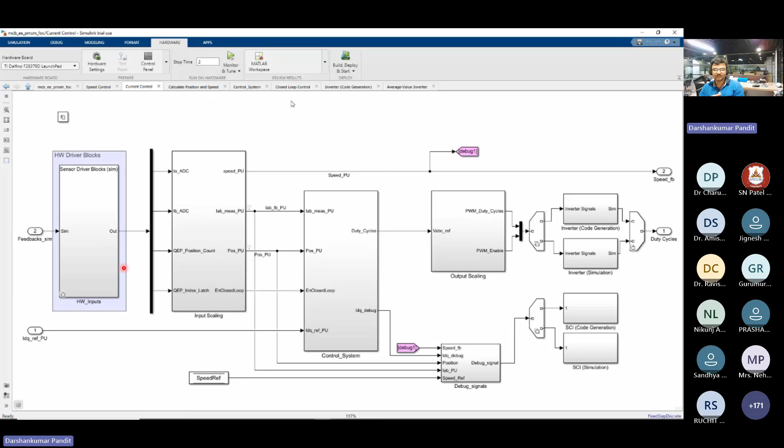You can have different control algorithms: open loop control, closed loop control. Within closed loop control, there can be various types. This one is field oriented control, where the feedback currents are processed through all the blocks that we discussed. Once that is done, your inverter will have some duty cycles that need to be generated via PWM blocks, so this is going to be fed to the PWM blocks.

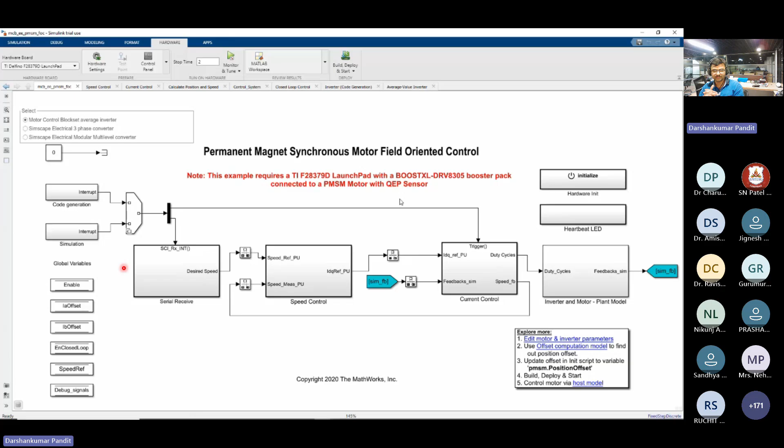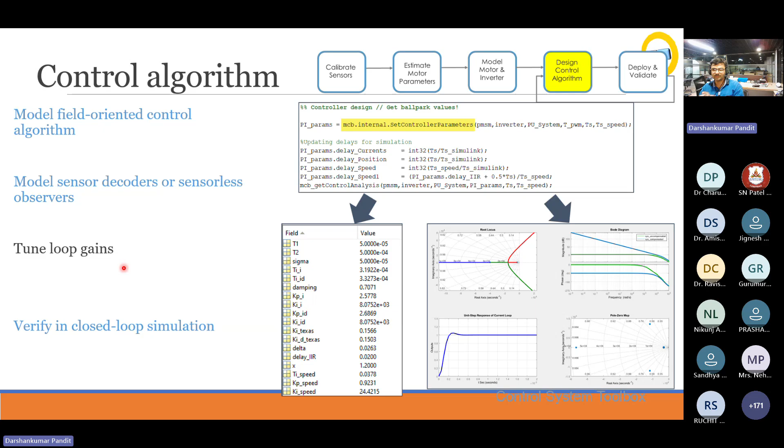As far as the plant model is concerned, that would go into simulation. There is also a concept of variants, where when you're simulating, it will only do simulation, and when you want to do code generation, all the plant model will be ignored by the program. The control design resides in this function, which would be automatically called, and it will automatically design the controller for you.

If you want, you can also do empirical calculations of this PID gain. There is also an option of FOC auto tuner, and there is also an option of classical control theory. So that's all about control design.

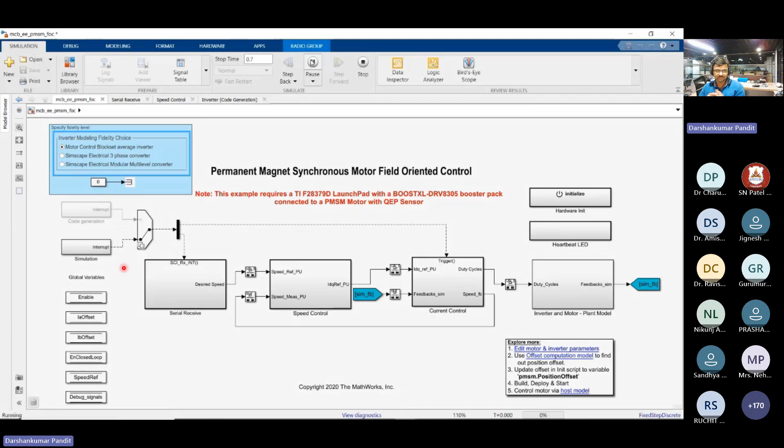When you open Simulink, you will find these models depending upon what system you want, Hall based or quadrature encoder based, or different inverters. You can download them from mathworks.com, and most of them would already be in your system. So you can choose the type of inverter modeling fidelity, and you can simulate the model.

This time, the model represents the real world system, and you can predict the behavior of the system correctly since the parameters are measured right. And as long as the parameters are right, you can compare within different fidelities of model. For example, the PWM one will have slightly different waveforms than the average value model.

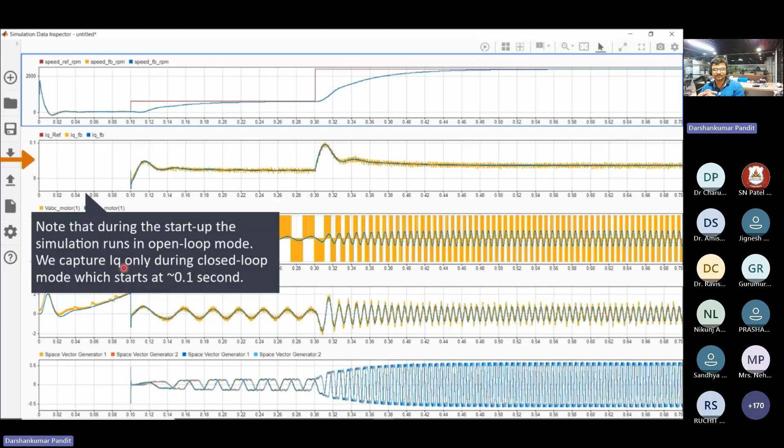During startup, you can see in this particular case the simulation runs in open loop mode, because we want to mimic the real world system. Until the real world system controller receives something known as the index pulse for the quadrature encoder, it is kind of open loop. But once it receives that position feedback via the index pulse of the quadrature encoder, it becomes possible for us to operate in closed loop.

Then you can analyze the PWM voltages and currents, behavior, and the modulation technique and whatnot. So simulation allows us to look into this. If it is not going to work, we will know beforehand that we have done something wrong. You can identify that beforehand, iterate over it, and make it work.

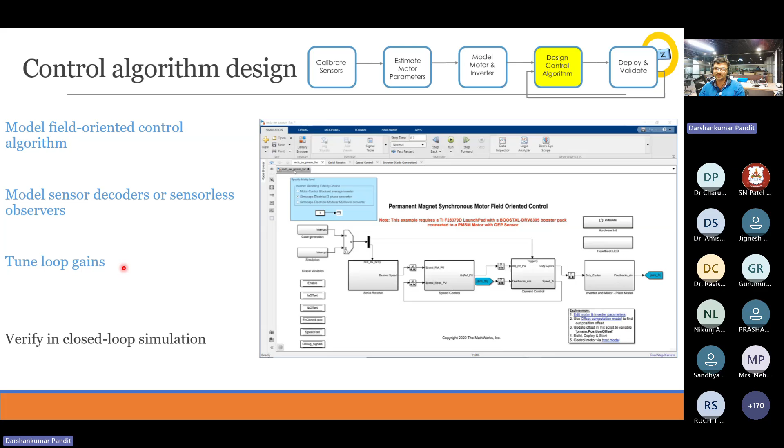Now comes the exciting part. If it works in simulation, since it is from real world parameters of motors, it is 100% going to work on the motor if you have been doing things right until now. So that is what can be done.

If it is inside Simulink, inside any model-based design software, you can just right click and generate C code for the algorithm only, or you can export the entire model. To do that, instead of going to simulation, you can just find out whether it is configured correctly or not. The first thing being highlighted here is the concept of sample time, so the algorithm is in a different sample time.

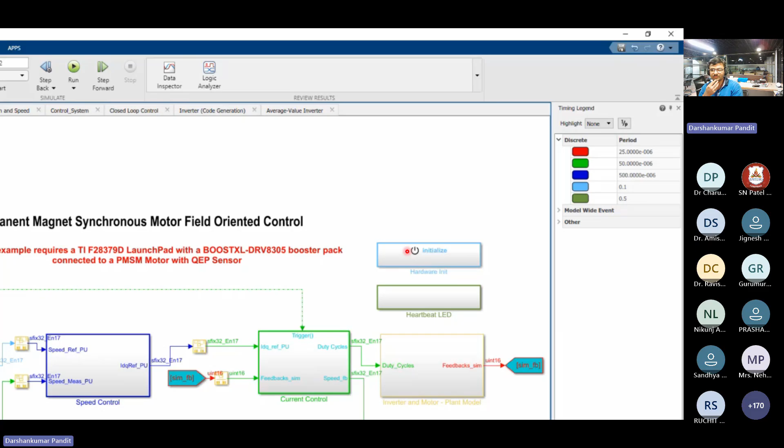The red one is 25 microsecond. Switching frequency in this example is 20 kilohertz, which represents 50 microsecond. That is the same as our control sampling time, the green time. Speed controller works 10 times slower, so it has a 500 microsecond sample time. You see different sample times.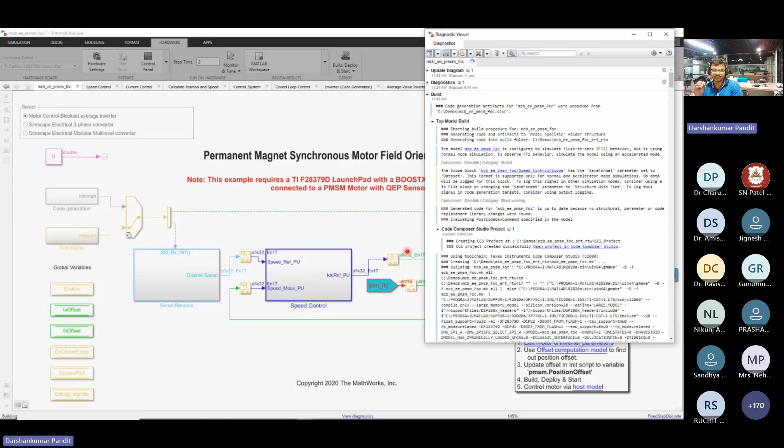There are different interrupts configured, so embedded system engineers would know what interrupts are. Based on these interrupts, we have a scheduler and operating system designed that will execute our control program, and all of this simulation model will be converted into C code deployable on your embedded hardware. You can also jump from the C code back into the model, iterate over it, and get something right if you want to do that.

Once it is done, there's also serial communication, which I explained earlier, that allows us to debug this in real time as the motor runs. You can run this host model on your computer or laptop, and it will communicate with the microcontroller via serial communication. You can start, stop, and control the speed of the machine and observe the trajectory.

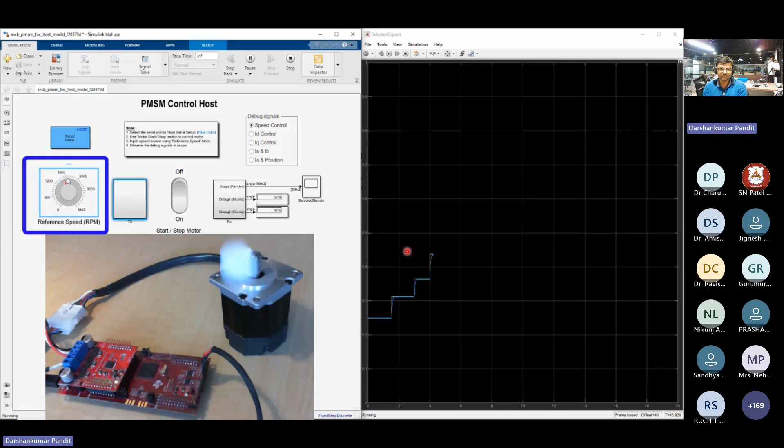So you can analyze the behavior, like whatever we tuned for in theory, is it going to work or is it not going to work? So, okay, it got paused. Sorry about that. And you can take the machine to different speeds.

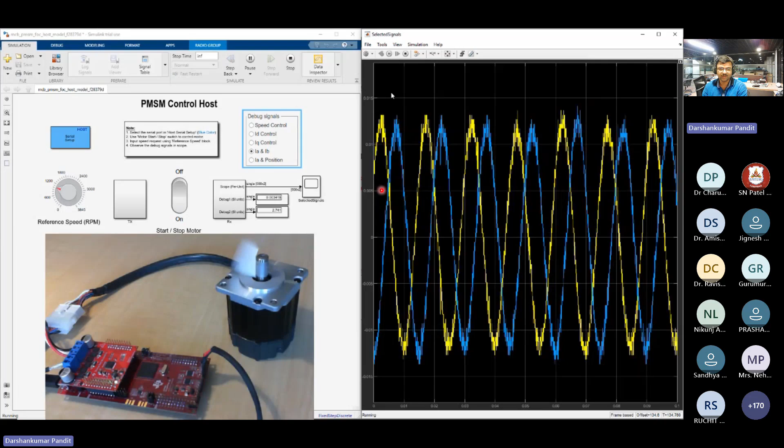One represents the base speed in this machine, that is 4000 RPM. You can check D axis current controller feedback, Q axis current controller feedback, currents for the stator in stationary reference frame, which is supposed to be sinusoidal currents. You can debug them. If there is something wrong, you will know here also.

It's like kind of an oscilloscope or stethoscope for the motor. And once you are done, you can validate on the hardware. You can also do something known as profiling of the code, like how fast is the code compared to what you would expect otherwise. In this case, it has to execute in 20 kilohertz or 50 microsecond sample time, and it actually executes...

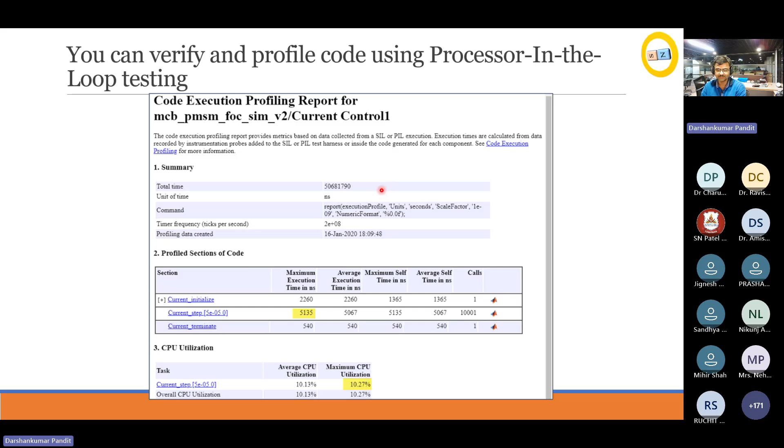So you can use these examples, and from MathWorks, if you're using MATLAB software, you have plenty of support available. That's all. You can post on the online community about all the equations for motor control and this thing.

As far as we are concerned, we are trying to build similar software, and we are trying to automate the entire workflow with automated MATLAB simulations. Whatever we saw, that would also get automated soon.

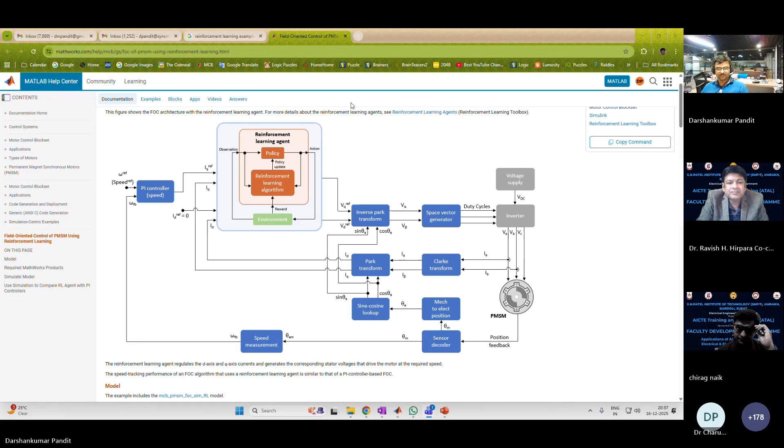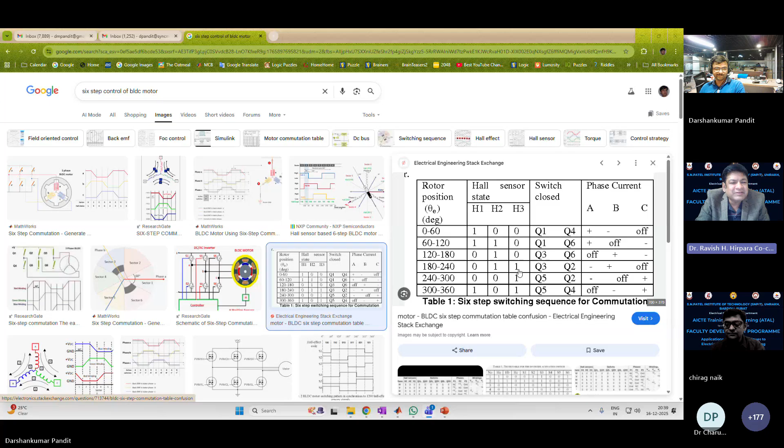I have one question, Darshan. Please, go ahead. How is it applicable in stochastic systems? I don't know, I have to ask this AI. What is stochastic? Stochastic means random variation. Random variation on what? Any parameter, torque, speed, consider noise in current or voltage.

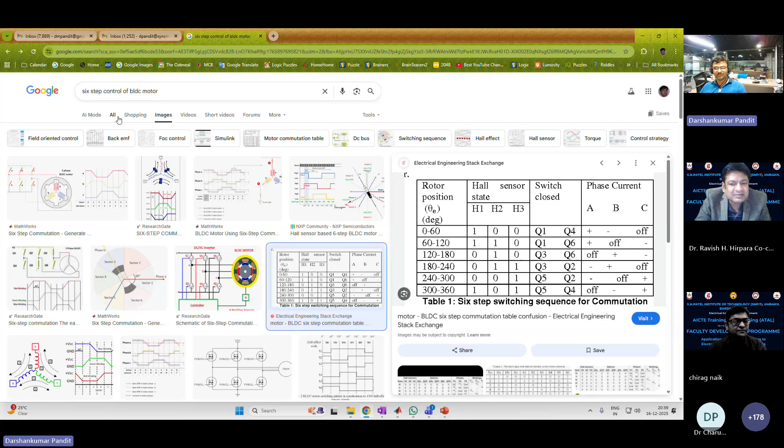How does it react? That requires some disturbance rejection. You have to update the control algorithm we discussed into disturbance rejection. There is also an example for that. You can search and find the active disturbance rejection controller, you can try that. Based on the application, the entire thing gets modified. So instead of the regular reinforcement learning control we were seeing, there is active disturbance rejection control. You have to modify your system for that. This is used to remove noise, like a Kalman filter and all, they are used to reject the noise specifically. There would be an example for this.

Another question: why did you choose PMSM, not SRM, for two-wheeler EV applications? It can be used for appliances. It's not like it cannot be used.

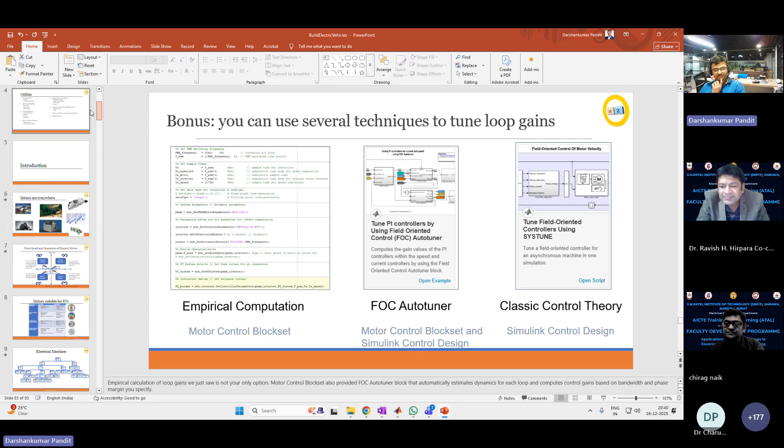It's just this slide which I was trying to mention, efficiencies are different, and there are three parameters to consider when selecting motors for EVs: one is volume, second is weight, and third is efficiency. The efficiency is usually higher for PMSM compared to switched reluctance motors or synchronous reluctance motors until now. Some startups are now trying to build synchronous reluctance motors having the same kind of volume, weight, and efficiency as a PMSM, but that is still undergoing research. If you are doing research in this area, please try to do that in synchronous reluctance motors, because that is where our country has a huge requirement of reducing import dependency.

These things are known as rare earth free motors. You can search them, there are plenty of them. A little marketing for my startup: there are plenty of rare earth free motors, we are working on them right now, but it's okay, it's not that confidential, I can reveal them. Going rare earth free allows us to reduce import dependency, and that helps us. So you can consider other motors, but the motor manufacturer should be able to achieve the same performance as a permanent magnet motor, specifically in terms of efficiency, weight, and volume.

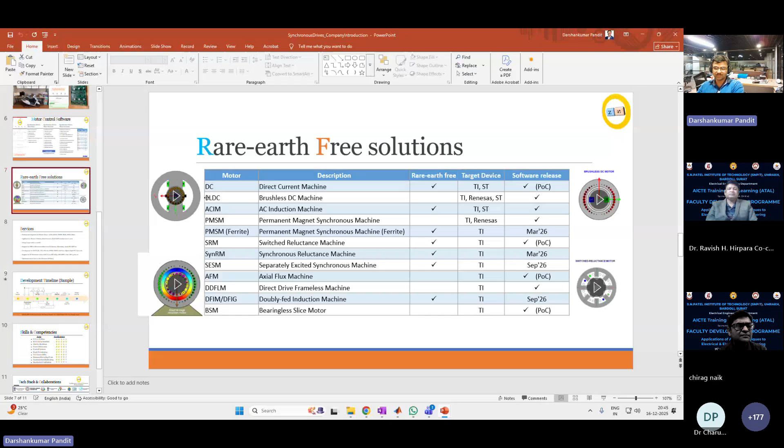As far as this motor, this is our lab at SVNIT, we are naming it Professor KL Arora Lab. This motor is a hub motor. It only has one bearing.

For the currents to damage the bearing, it requires a return path, which is available whenever the motor is an industrial motor that has two bearings at two ends. Generally, one bearing will have some current voltage introduced, and the rotor currents will find a local path through the second bearing. This can be removed in industry also via something known as insulated bearing, so one of the bearings you can use insulated and there won't be any current passed through it.

So you don't require current signature analysis, but that helps in detecting mechanical wear and tear of the bearings.

For the EV industry, you'll expect the vehicle to run for 15 to 20 years, and maybe you will overhaul the motor after 5 years. So motor designers have to take care of the design itself so that you don't end up with that problem. Industrial motors run for 24 hours, 365 days, so there this problem is more prominent, but sooner or later it will come.

That is fair. Any other question? Advantages or reasons for selecting doubly fed induction motor for EV applications.

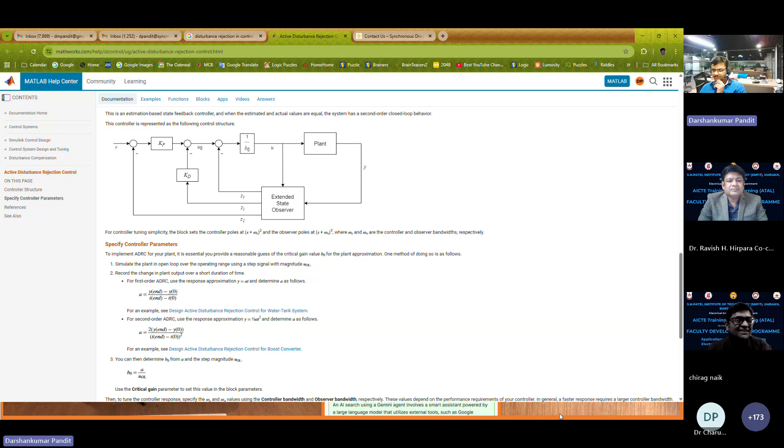But if everybody adopts electric vehicles, we cannot get that forever. That is why people are trying to research in other directions.

Okay, so any other questions? By the time a question comes, I can show the video of our product. That will be more interesting. We are also creating our software for Indian companies who are trying to build their own electric vehicles, and of course, we are building our hardware. But it's okay, right now I have to probably find some others. Keep the questions coming so I can share it. Participants, you can write your question in the chat box if you want, meanwhile.

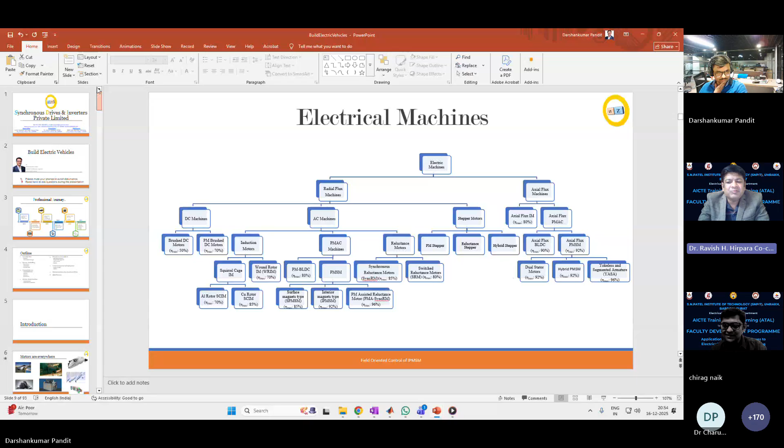What about Raspberry Pi, instead of PI controller in motor field control? What about Raspberry Pi instead of PI controller in motor field control?

Yeah, so actually Raspberry Pi is a computer that has a microprocessor. And as far as implementing all these complex algorithms are concerned, even whatever is the latest microprocessor you may have seen, i9 Core i9 by Intel, or some AMD processor, or even NVIDIA's latest chip, they all are slow, for electrical engineers, they would understand and appreciate, because you have to execute the program in microseconds. All of these controllers are so slow, obviously Raspberry Pi is slow. It cannot directly do that.

But if you want to implement Raspberry Pi, you can do something as simple as a six-step control to drive a BLDC motor. That is possible. Certainly, we have tried that. It allows you to do the flexibility of doing something known as IoT, Internet of Things. So for example, we used our AI, so we can connect our AI with that BLDC six-step control using Raspberry Pi, because it has peripherals that connect with LAN, and you can also generate PWM. So that gives that flexibility.

But that is certainly not going inside the vehicle. It's going to be super slow. There are much faster and much more dedicated options available.